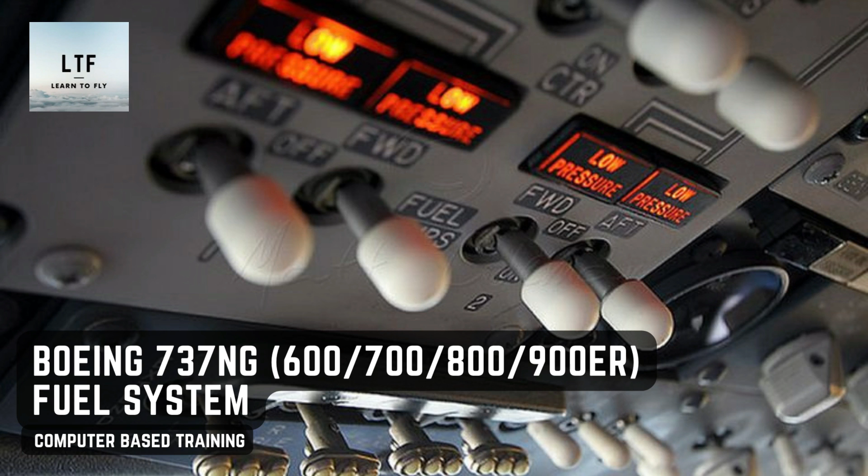The 737 airplane has 3 fuel tanks. Main tank number 1 and number 2 are in the wings. Each tank has a usable fuel capacity of 3,867 kilograms.

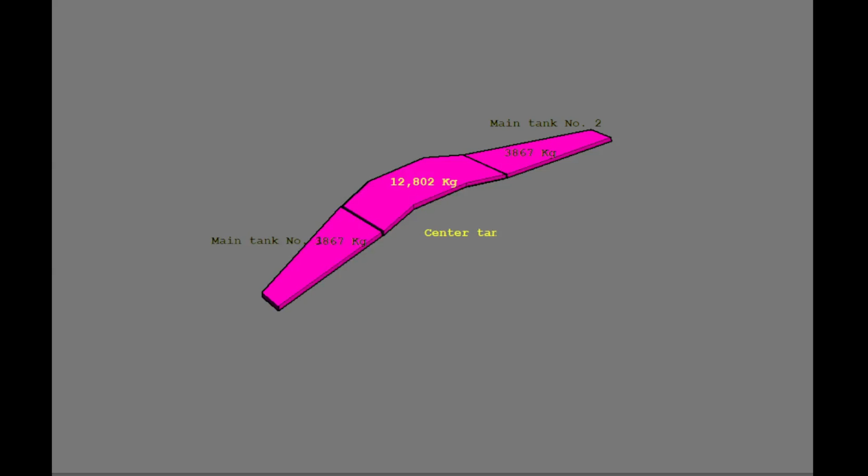Most of the center tank is in the fuselage. The center tank usable fuel capacity is 12,802 kilograms.

The airplane has an external fueling station in the right wing.

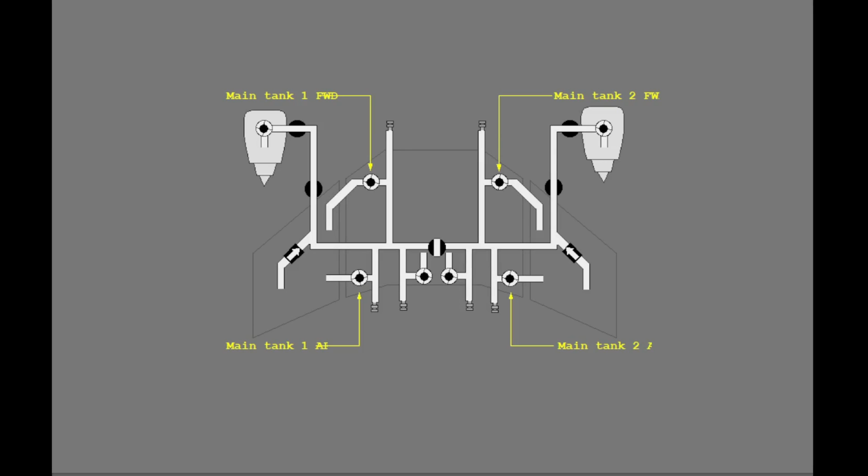Each main tank uses 2 electrical pumps, one forward and one aft. The center tank has a left fuel boost pump and a right fuel boost pump.

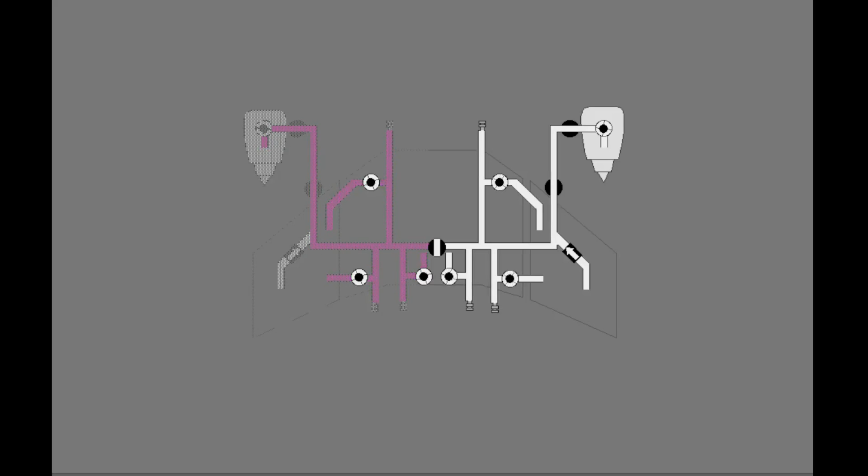The main tank number 1 and the left center fuel pump supply fuel to engine number 1. The main tank number 2 and the right center fuel pump supply fuel to engine number 2.

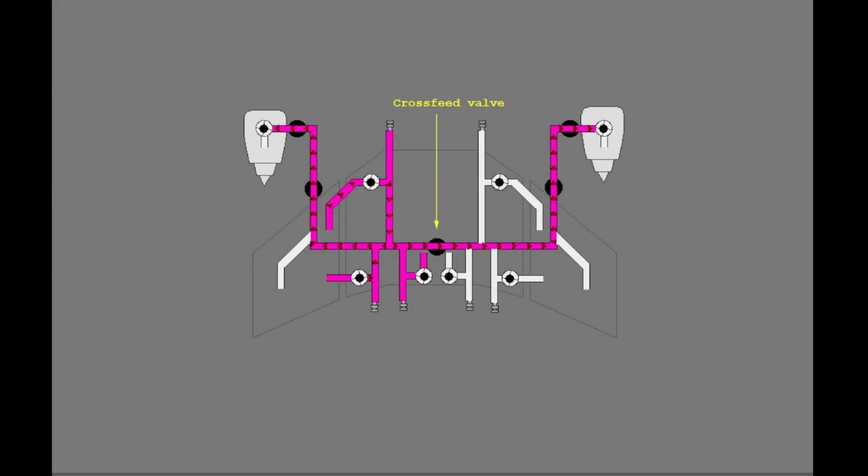The cross-feed valve lets the main fuel tanks supply fuel to the opposite engines. The check valves make sure the fuel flows in the correct direction. This prevents the movement of fuel into the tanks.

The center tank fuel pumps are like the main tank pumps, with 2 differences. First, they have a higher output pressure than the main tank fuel pumps, so center tank fuel is used before main tank fuel.

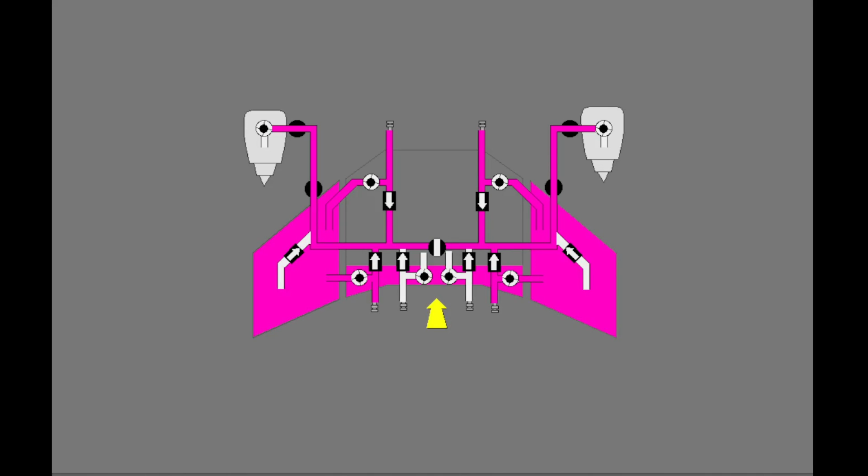In addition, the center tank pumps have auto shutoff logic. It shuts off the associated pump when the fuel pressure decreases to a preset value.

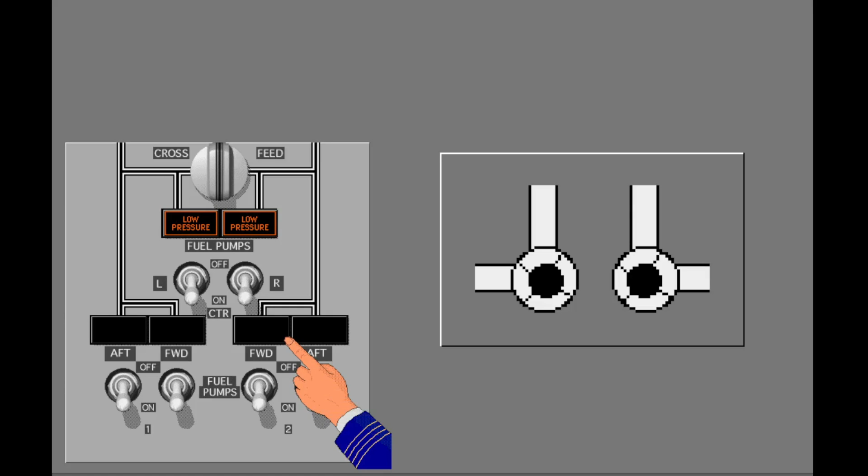Selecting a center tank pump switch off, then back on, resets the auto shutoff logic, and the pump returns to operation until deactivated by low pressure.

An engine fuel shutoff valve and a spar fuel shutoff valve are in each fuel line to the engine and are electrically operated.

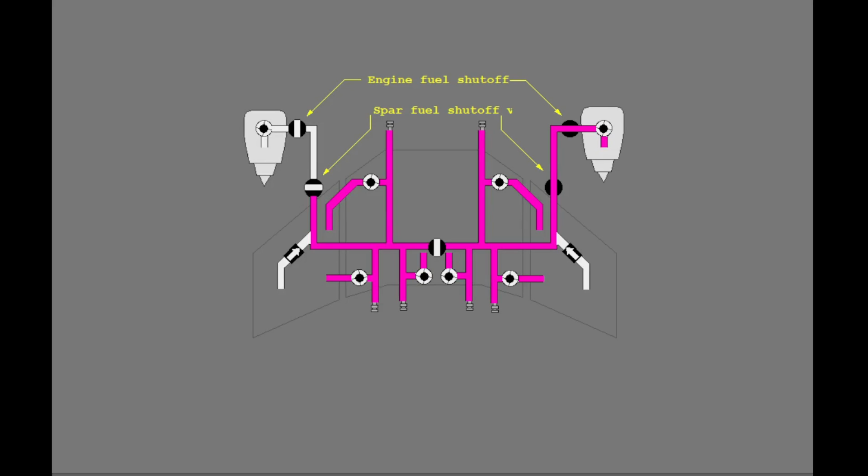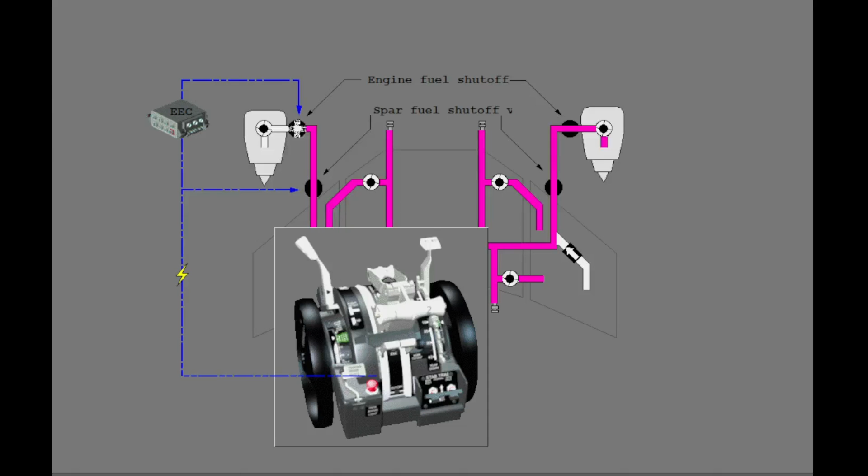The spar fuel shutoff valve is electrically controlled directly by the engine start lever, while the engine fuel shutoff valve is electrically controlled through the electronic engine control.

The engine fire warning switch electrically controls the 2 valves.

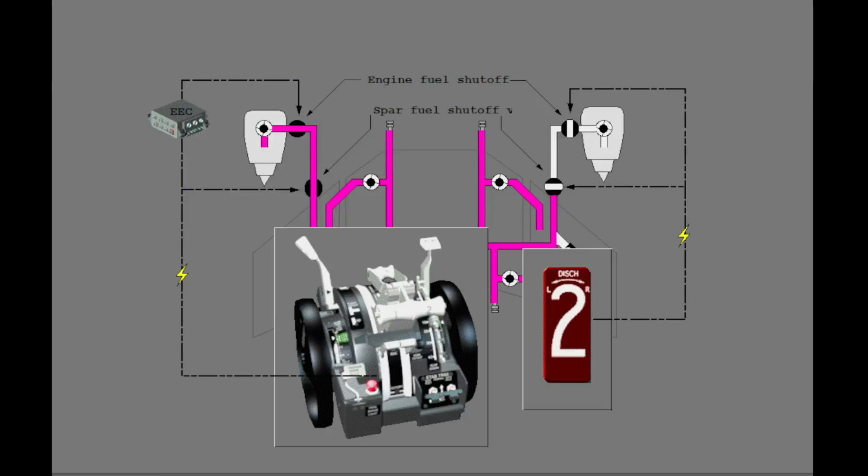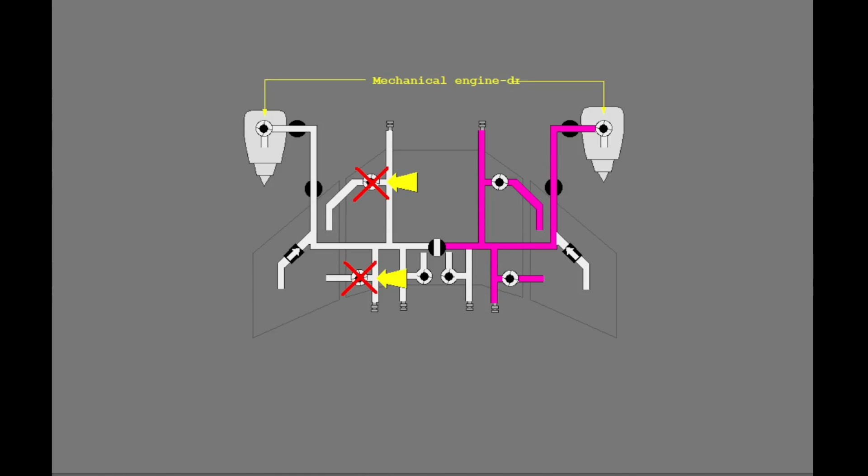A mechanical engine-driven fuel pump supplies suction fuel feed when there are no fuel pumps to supply pressurized fuel to the engines. In this example, the 2 main tank number 1 fuel pumps have failed and there is no fuel in the center tank.

The mechanical engine-driven fuel pump moves fuel through a bypass valve in each main tank. There is no bypass valve in the center tank.

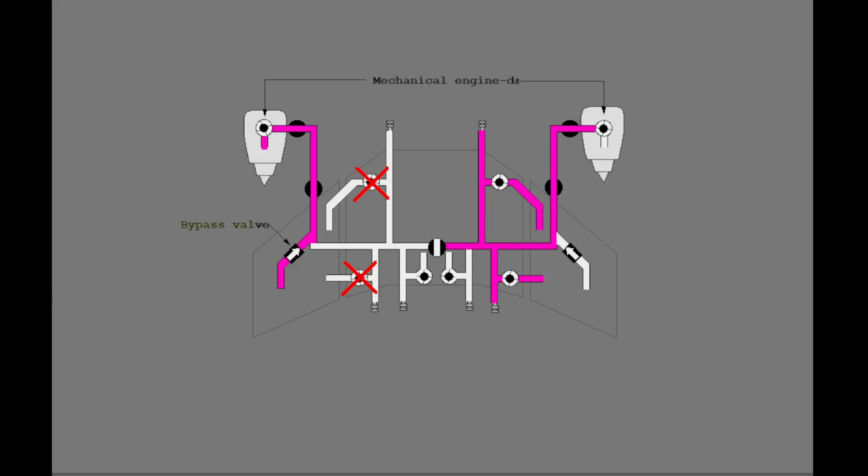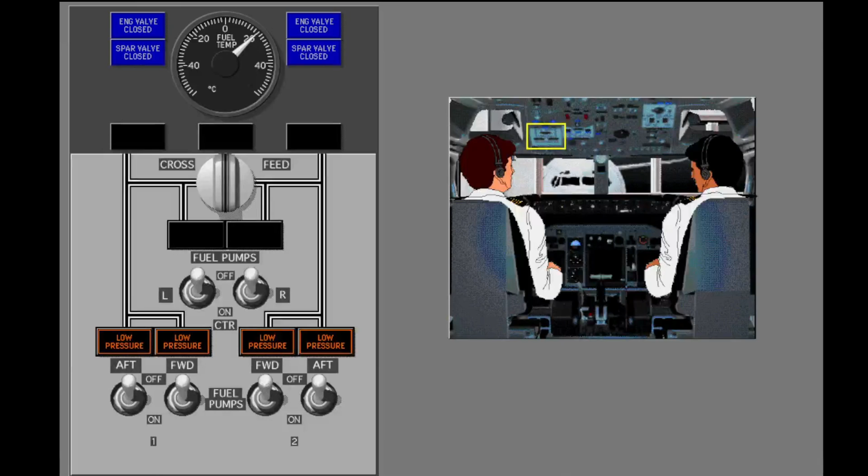The fuel control panel is on the forward overhead panel. The fuel pump switches operate the fuel pumps.

Now turn on the right center tank fuel pump. The right center fuel pump now supplies fuel to the right side of the fuel system.

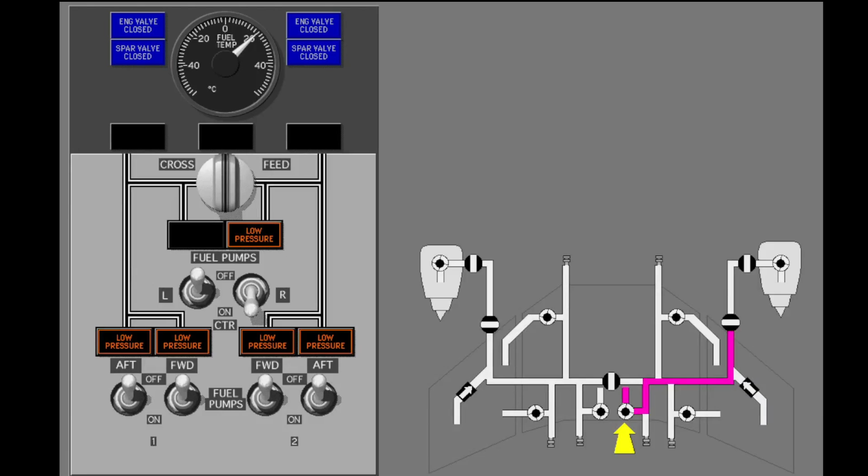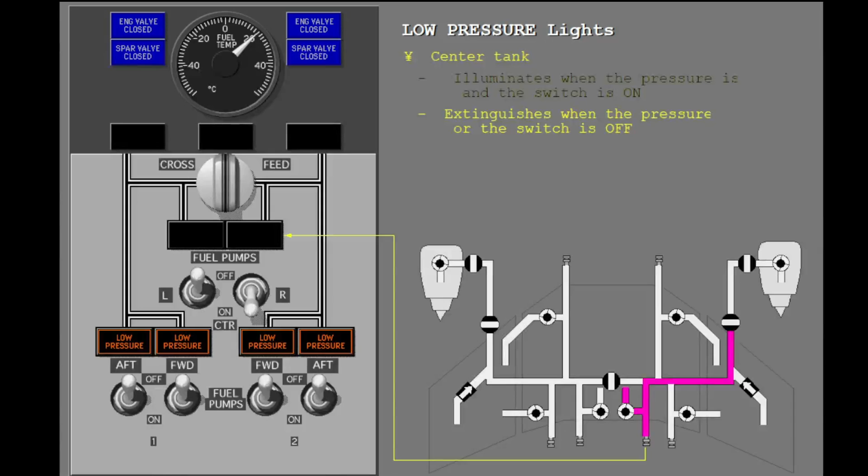A low pressure light for the right center fuel pump illuminates when the output pressure is low and the related fuel pump switch is in the on position. The light extinguishes when the pressure is normal or the switch is in the off position.

Turn on the left center tank fuel pump and look at the indications. Turn on the two fuel pumps for main tank number 1.

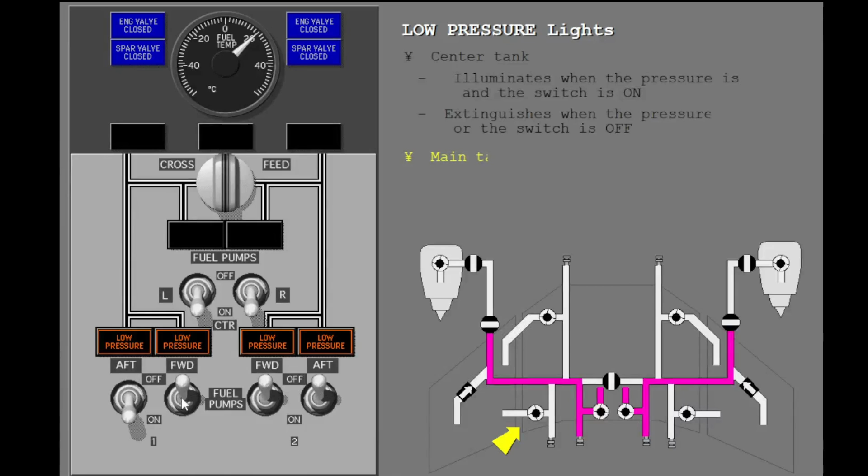The low pressure light for a main tank fuel pump illuminates when the output pressure is low or the switch is in the off position. Unlike the center tank pumps, main tank pump low output pressure does not deactivate the pump.

The light extinguishes when the output pressure is normal and the switch is in the on position. Turn on the two fuel pumps for main tank number 2 and look at the indications.

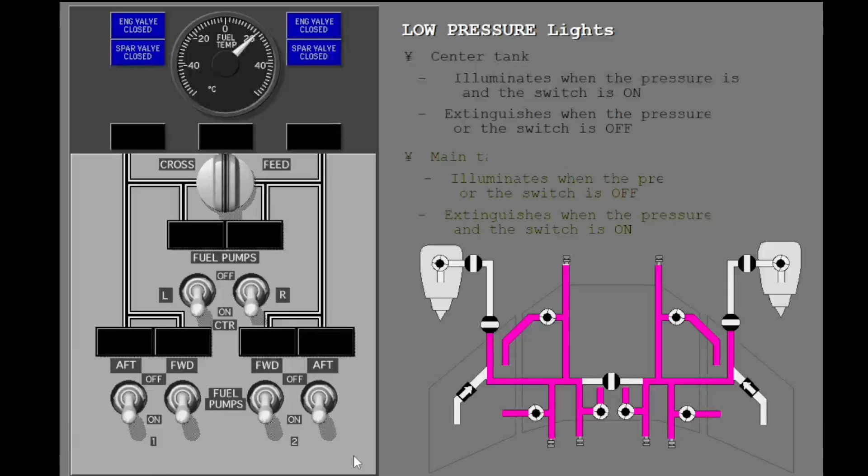The cross-feed selector controls the cross-feed valve. The selector is in the closed position and the related valve open light is extinguished. Open the cross-feed valve and look at the indications.

When you turn the selector to open, the valve open light illuminates bright. It shows the cross-feed valve is in transit or not in the commanded position.

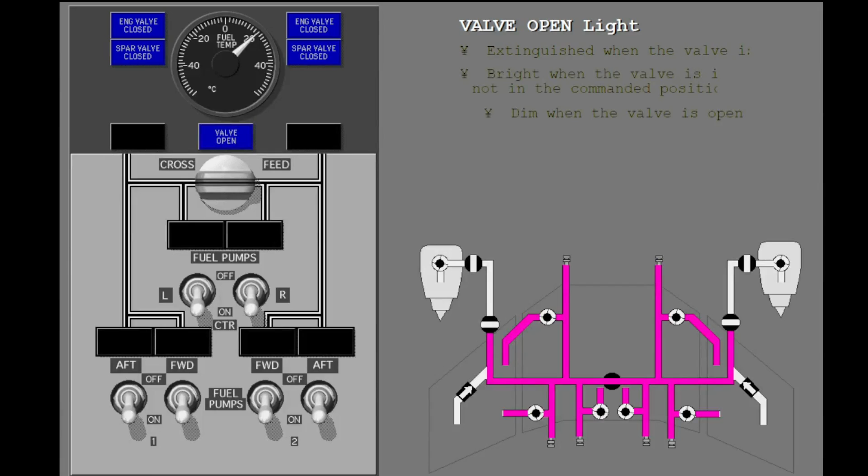The light illuminates dim when the valve is open. When the cross-feed valve is open, the right and left sides of the fuel system are connected. Now close the cross-feed valve and look at the indications.

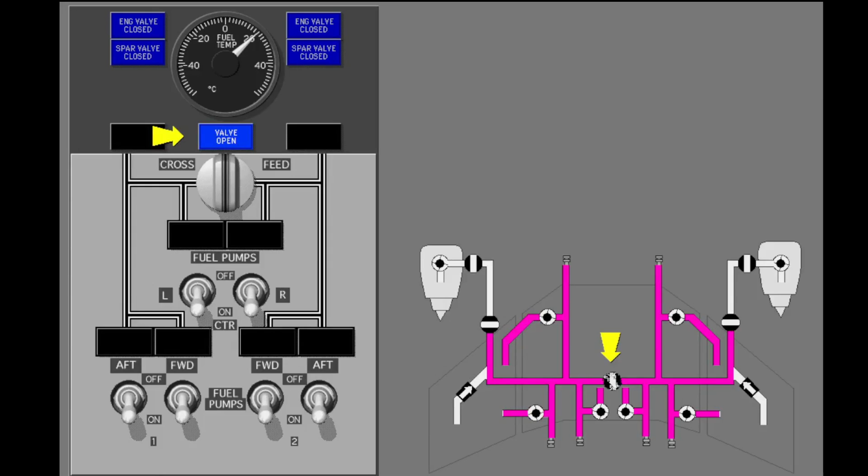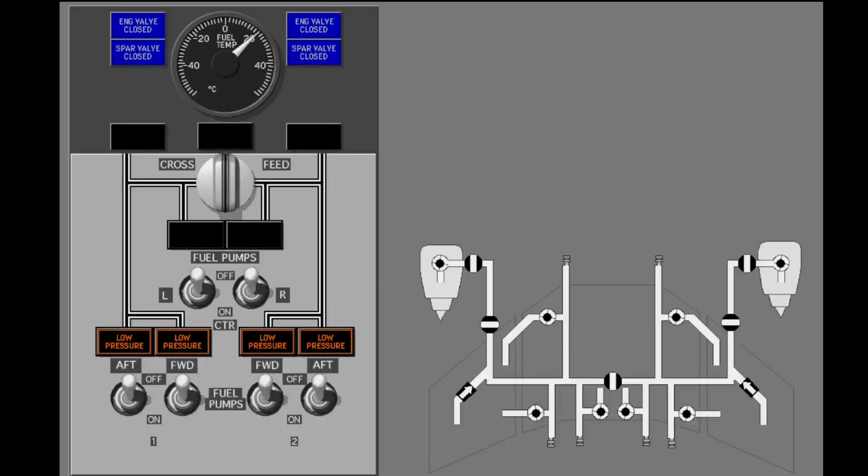The fuel system is now in a typical pre-flight configuration. The engine valve and spar valve closed lights show the positions of their related fuel shutoff valves.

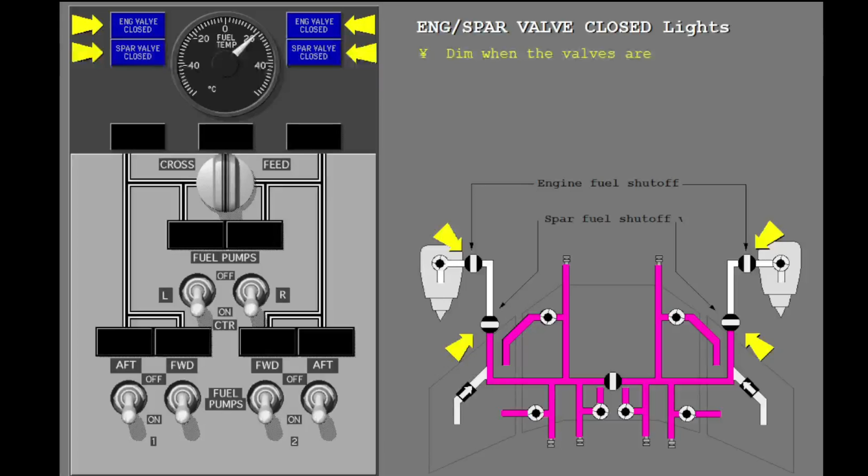When the valves are in the closed position, the lights illuminate dim. The lights illuminate bright when the valves are in transit or not in their commanded position. The lights extinguish when the valves are open.

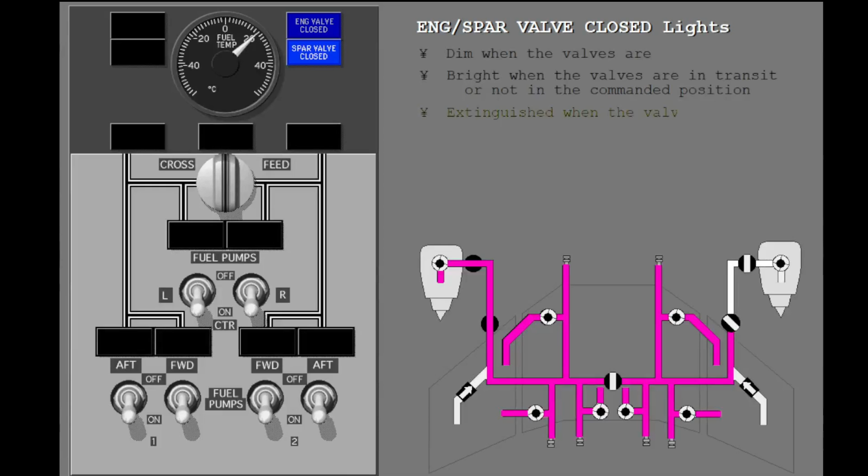The fuel temperature indicator shows the fuel temperature in main fuel tank number 1. The maximum permitted fuel temperature is 49 degrees Celsius.

The minimum permitted fuel temperature is the higher of two values: minus 43 degrees Celsius or the fuel freeze value plus 3 degrees Celsius.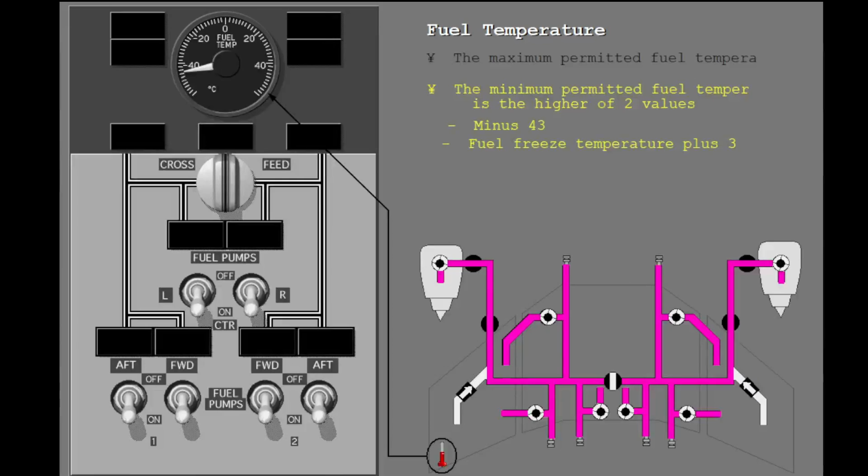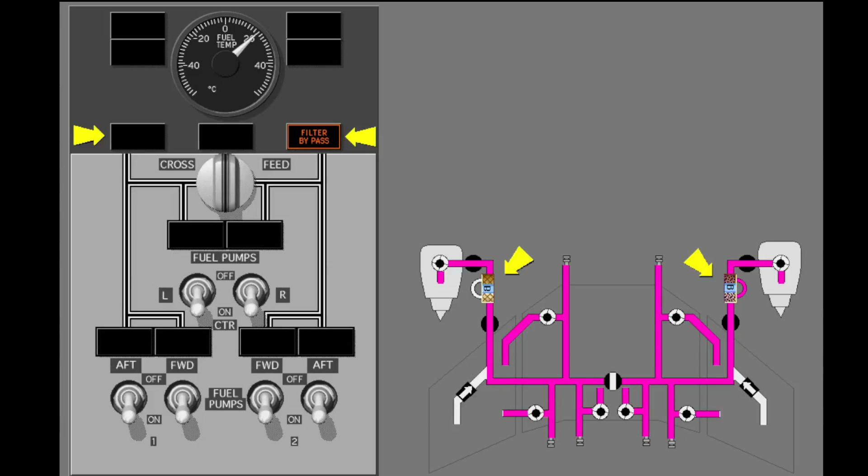The filter bypass light illuminates to show there is an impending filter bypass because the filter is contaminated.

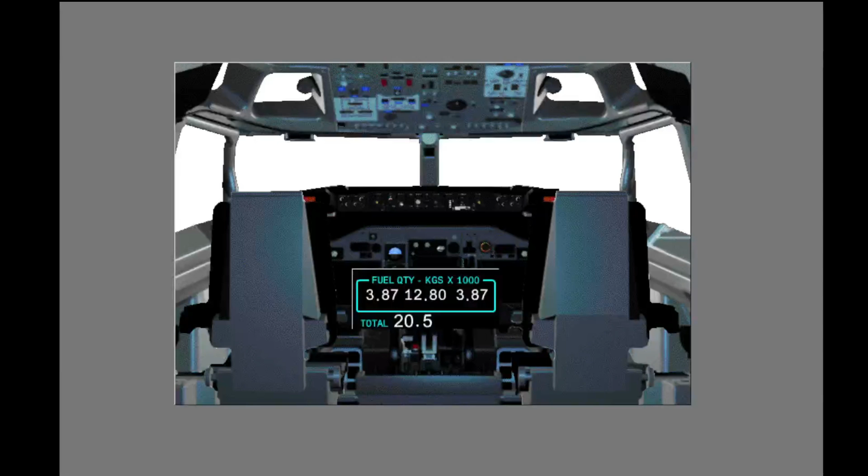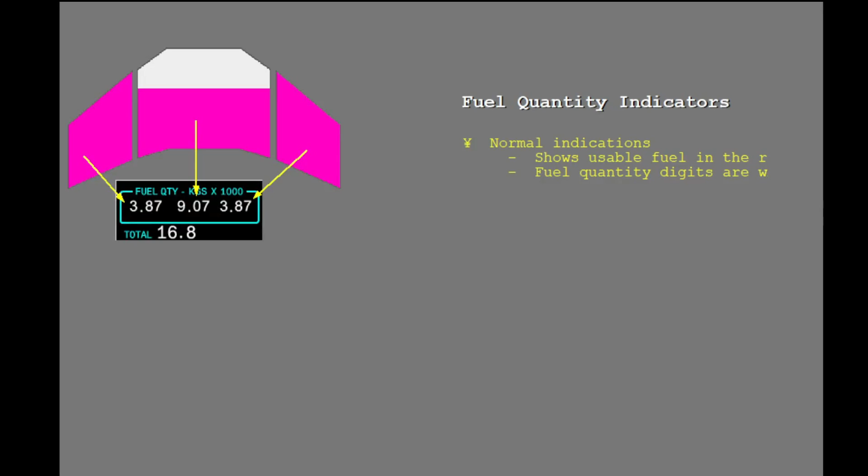Fuel quantity indicators are on the upper display unit. The fuel quantity indicator shows the usable fuel in each tank. Touch any control or indicator to review its function.

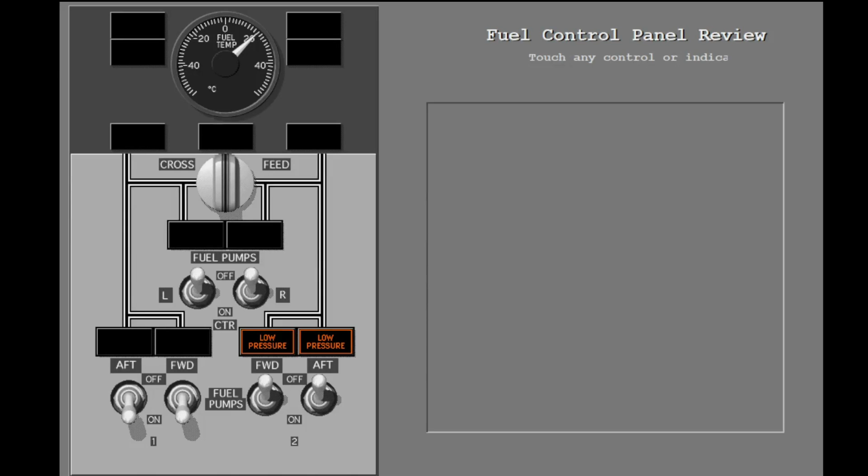For pre-flight, you set the fuel control panel for engine start. First, make sure the engine valve and spar valve closed lights are illuminated dim, and the filter bypass lights are extinguished. Close the cross-feed valve.

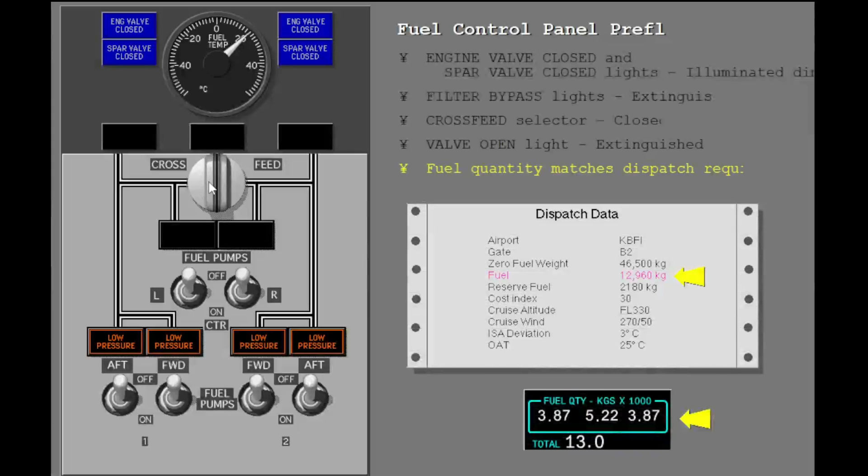Make sure the valve open light is extinguished and the total fuel quantity matches dispatch requirements.

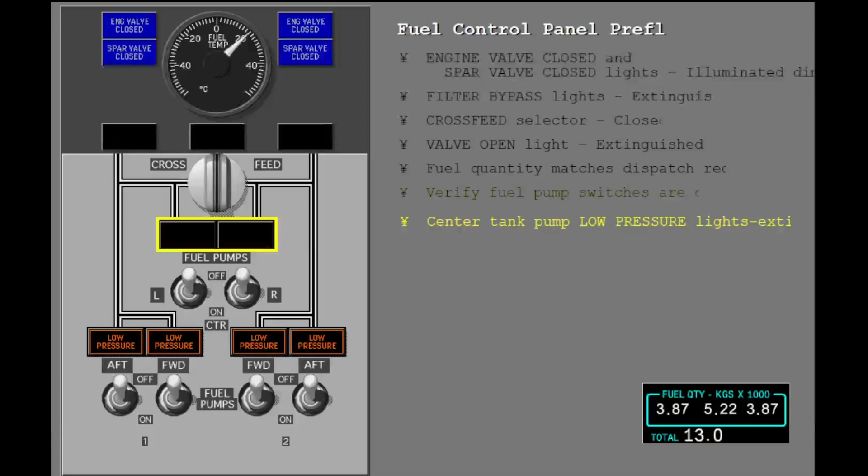The fuel pumps for the tanks remain off. The pumps will be selected on later during the engine start procedure. Make sure the center tank low pressure lights are extinguished and the main tank low pressure lights are illuminated. The fuel control panel portion of the first officer's pre-flight is now set.

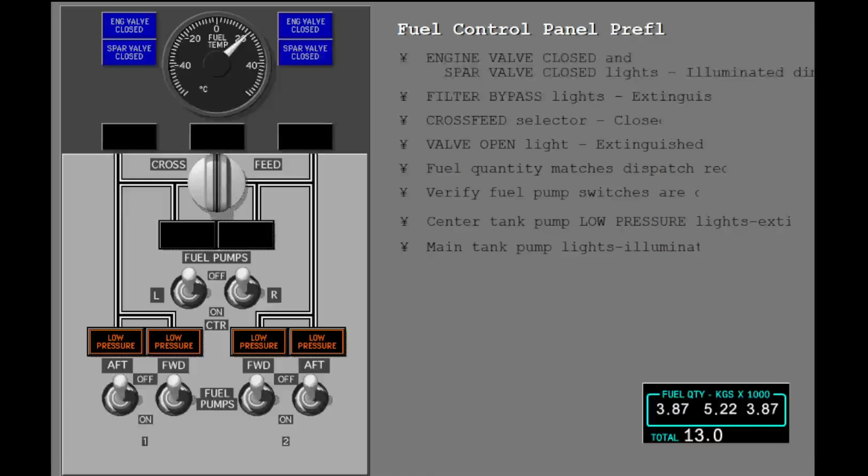It's now departure time. You have received a clearance for engine start. Accomplish the before start procedure. Center tank quantity is more than 500 kilograms, so turn on the center tank pumps with the other pumps.

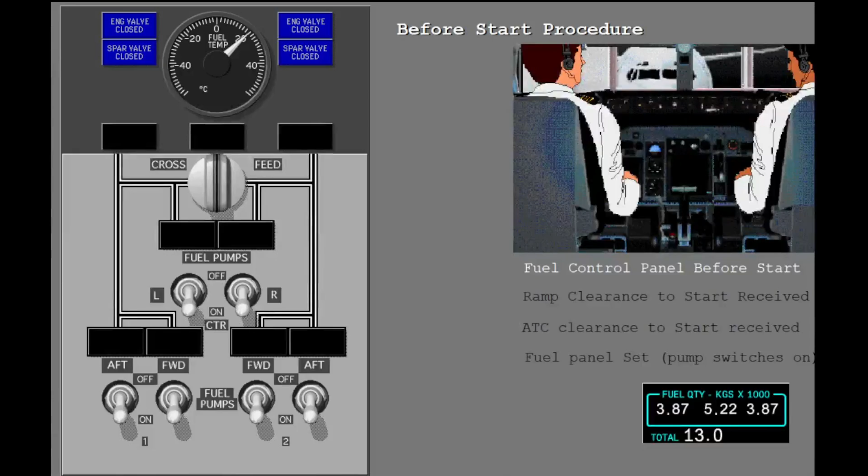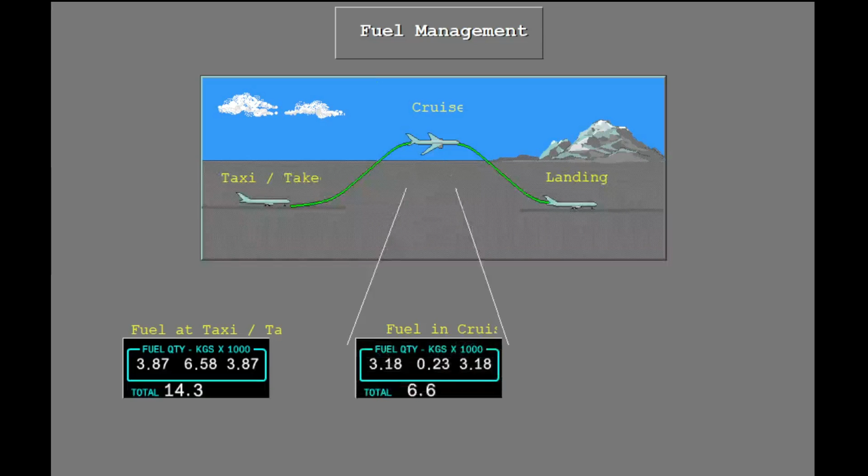We now discuss fuel management for normal flight operations. Fuel must be balanced for taxi, takeoff, cruise, and landing.

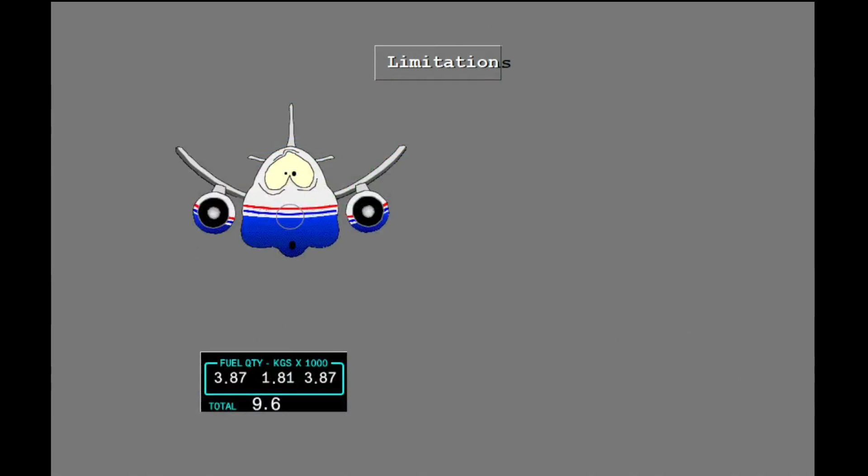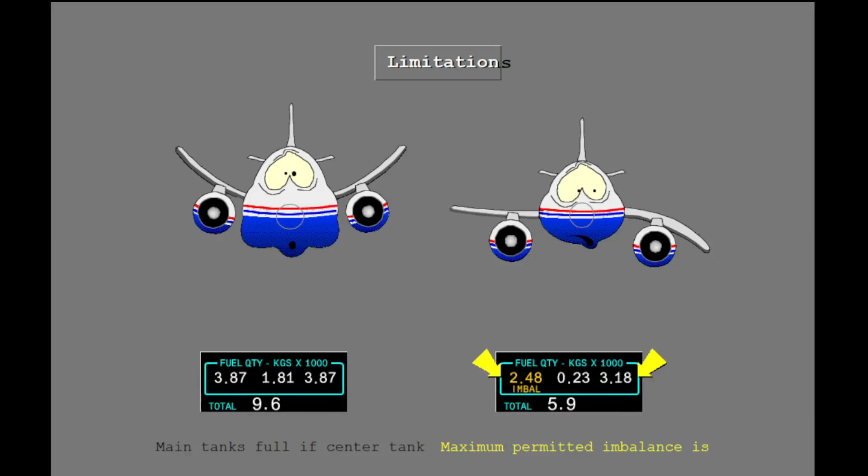The two main fuel tanks must be full if the center fuel tank has more than 453 kilograms of fuel. The maximum permitted difference in fuel quantities between the main tanks is 453 kilograms. If the difference is more than 453 kilograms, an amber imbalance alert is shown on the indicator with a lower fuel quantity.

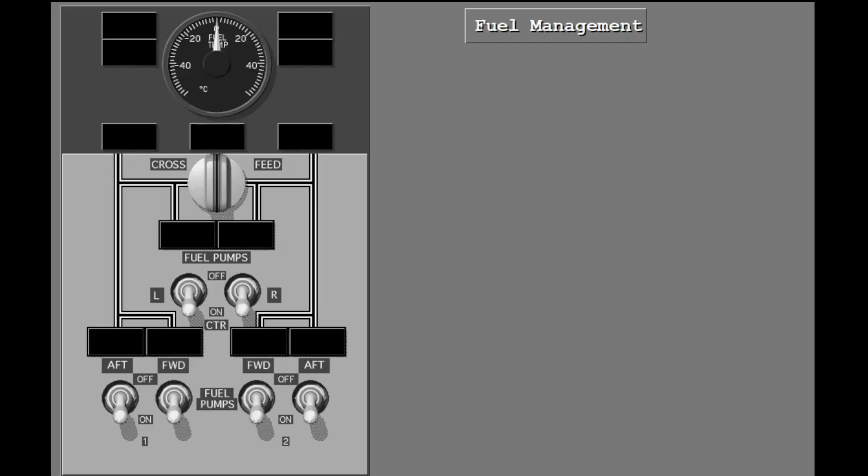Now let's continue fuel management during normal flight operations. During climb and cruise, if a center tank low pressure light illuminates, move the pump switch to the off position.

If a center tank pump low pressure light illuminates with the center tank empty during climb or cruise, move both switches to the off position. Select both pumps off now. Continue.

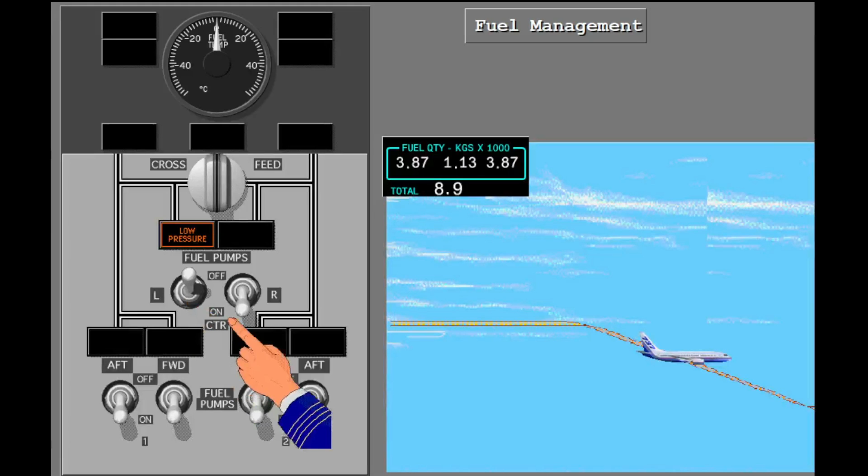During descent, if a center tank low pressure light illuminates, move the pump switch to the off position.

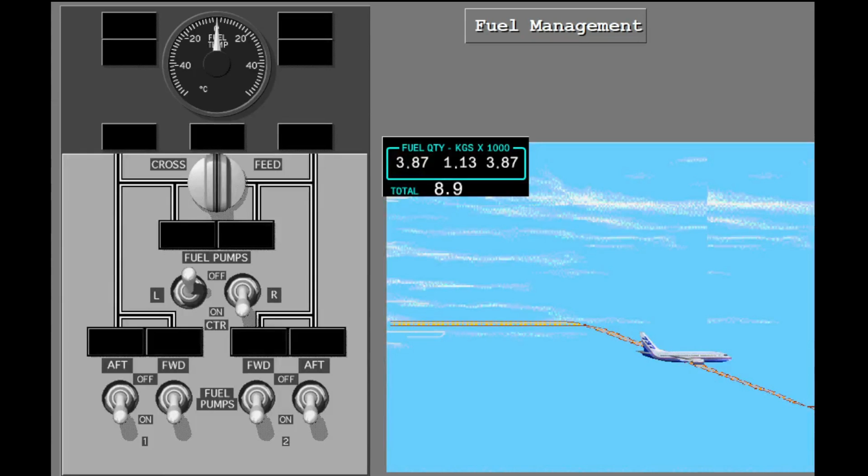On descent, if extended level off is required for holding or other reasons, and center wing quantity has usable fuel with pumps selected off, set the pump switches to the on position. Select the pump switches off when the low pressure light re-illuminates.

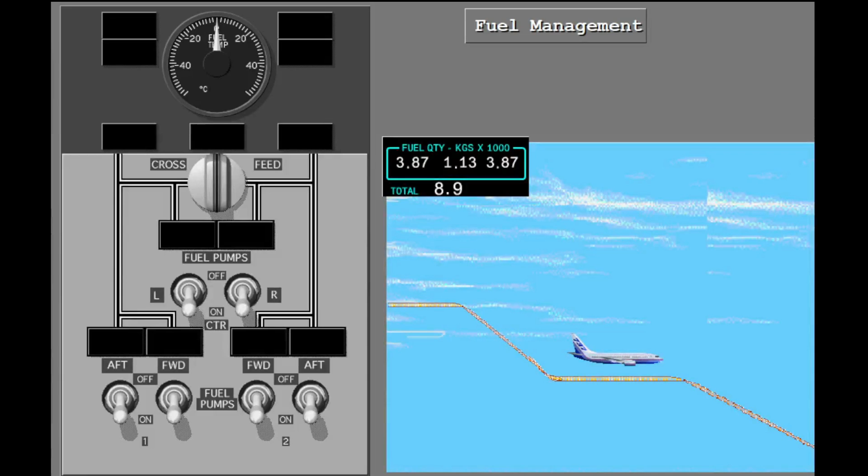If a center tank pump low pressure light illuminates with the center tank empty, then move both switches to the off position. Select the pumps off now. Continue.

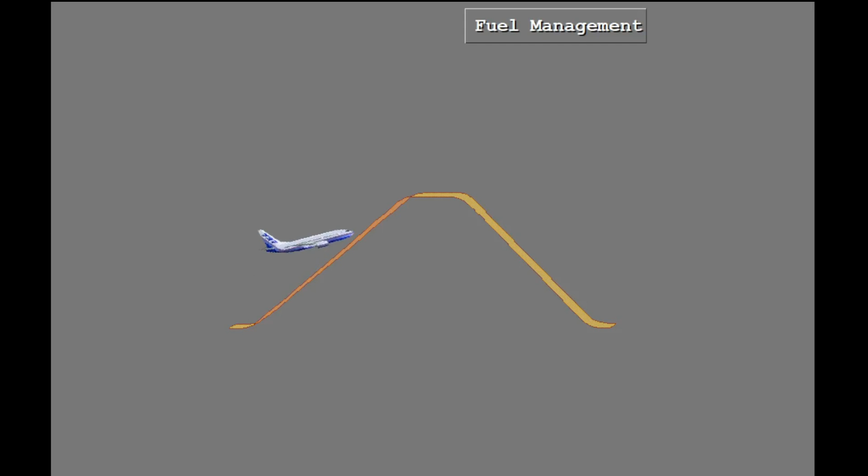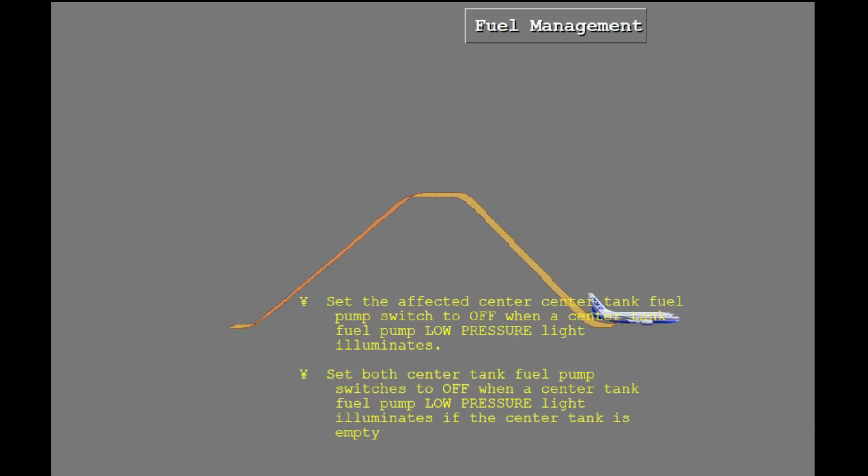Take a few moments to review center wing fuel pump operation for climb and descent, then continue to the next frame.

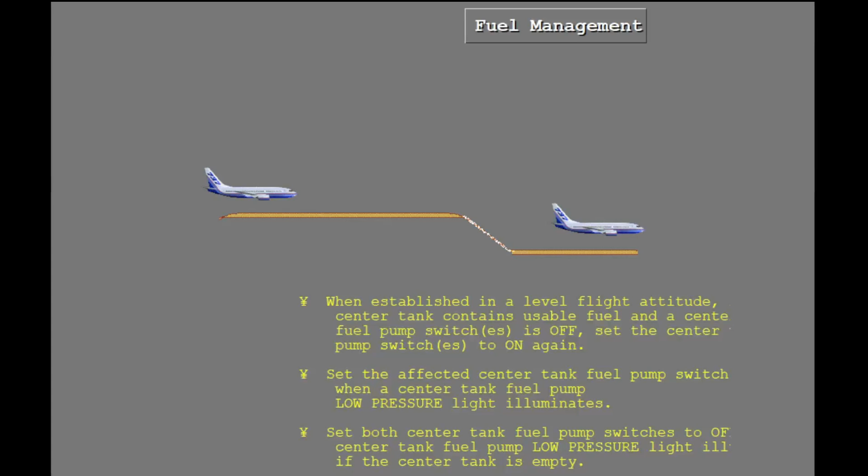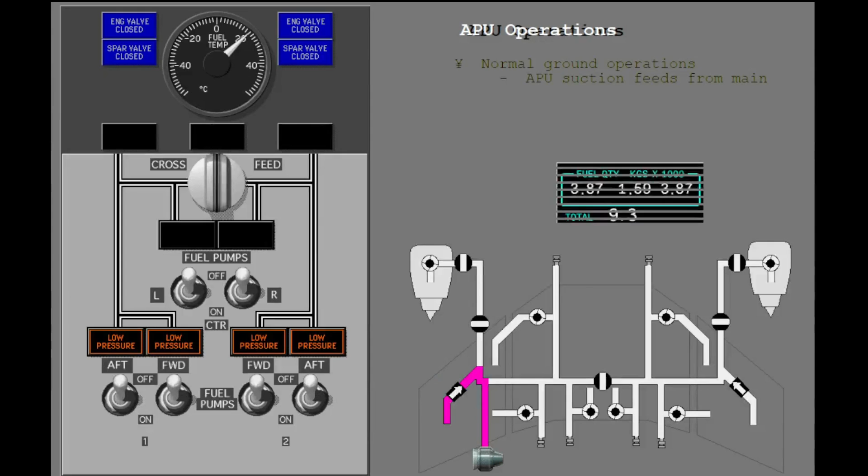For normal ground operations, the APU uses suction to get fuel from main fuel tank number 1. But extended APU operations can cause a fuel imbalance.

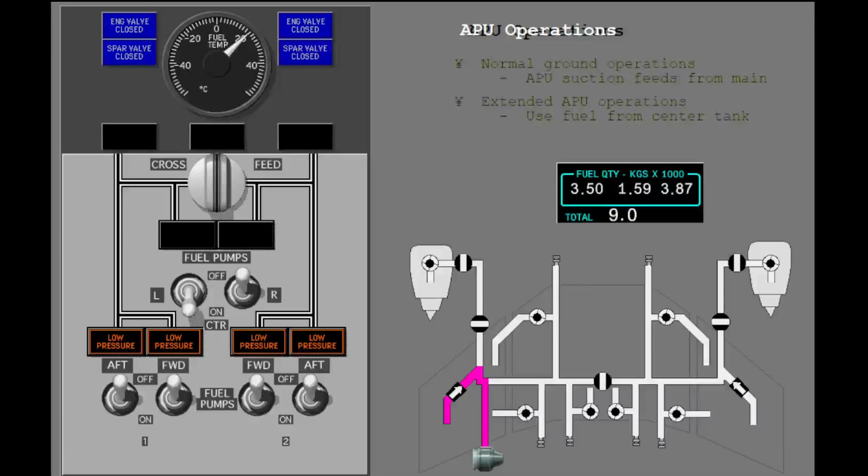If extended APU operations are required, fuel from the center tank is used to prevent an imbalance. Turn on the left center tank fuel pump. Now the APU gets fuel from the center tank.

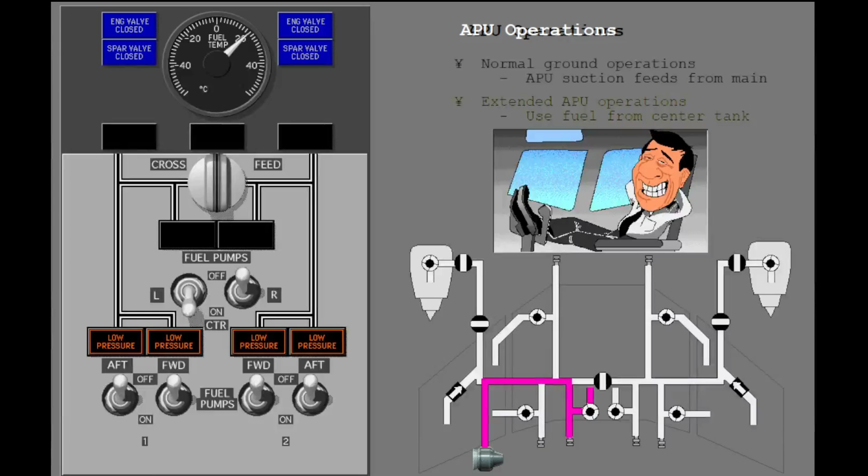The flight is completed and the airplane is at the gate. After engine shutdown, turn off all the fuel pumps.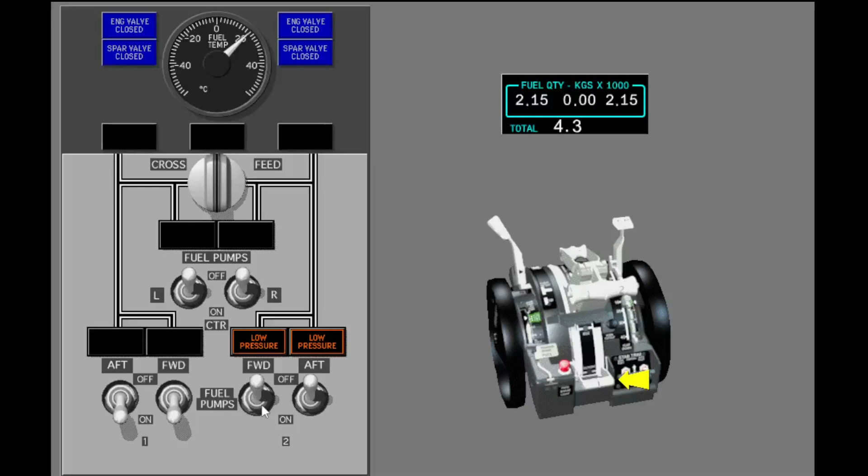Let's now look at some non-normal conditions related to the fuel system. There are 3 non-normal conditions that relate to fuel quantity. They are fuel configuration, fuel imbalance, and low fuel.

With these conditions, an amber alert shows on the affected indicator and the digits and arc color change to amber. In this example, there is a fuel imbalance.

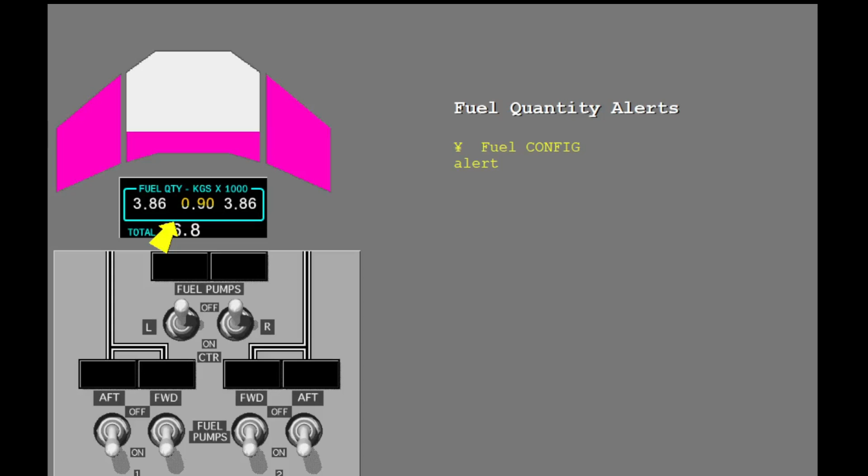A fuel configuration alert is shown on the center tank if the fuel quantity in the center tank is greater than 726 kilograms, at least one engine is running, and the 2 center tank pumps are off. In this example, the center tank pumps are off.

The alert is inhibited when the center tank fuel quantity is less than 363 kilograms.

If there is a difference in fuel quantity between the main tanks of more than 453 kilograms, a fuel imbalance alert is shown on the indicator with the lower fuel quantity. The alert extinguishes when the imbalance is less than 91 kilograms.

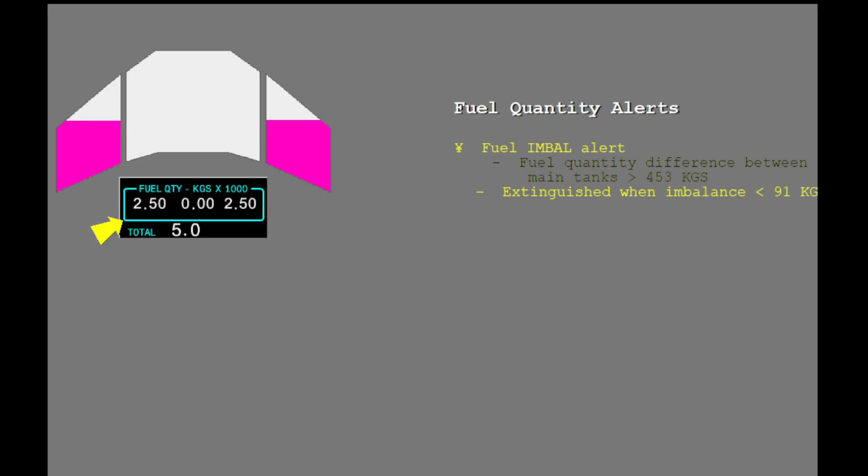A fuel low alert is shown when the fuel quantity in a main tank is less than 907 kilograms. The fuel low alert inhibits the fuel imbalance alert when the 2 conditions exist. The alert extinguishes when the fuel quantity is more than 1,134 kilograms.

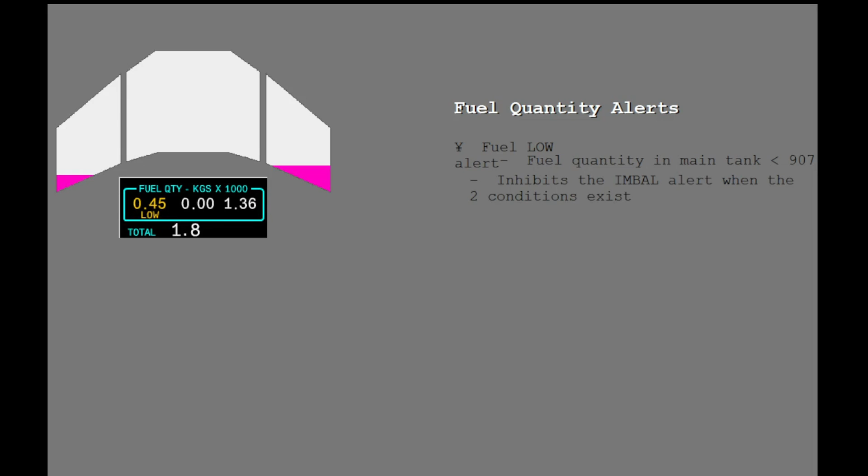Here is a review of the fuel quantity alerts.

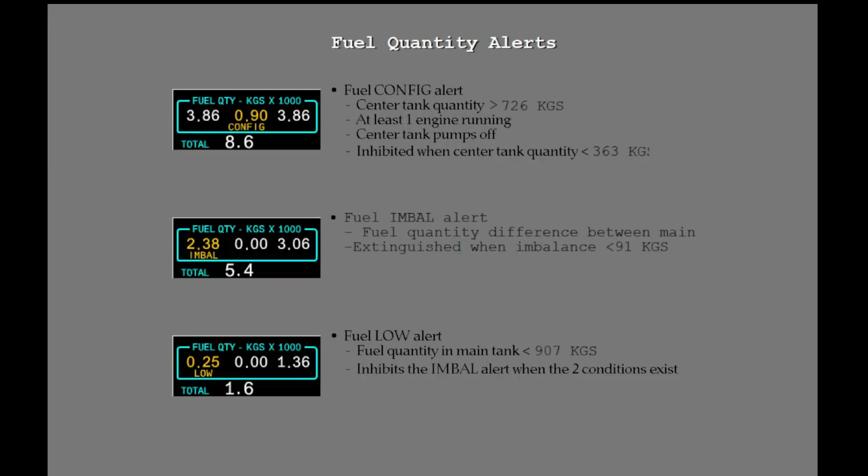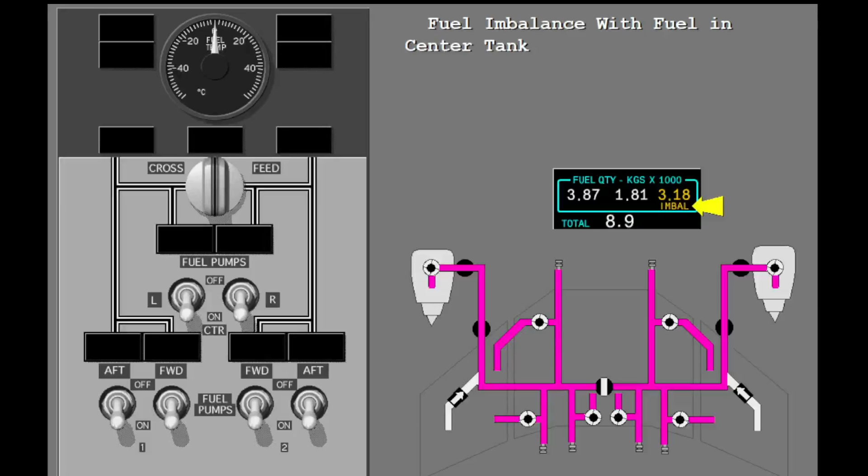Now let's correct an in-flight fuel imbalance. The first example is an in-flight fuel imbalance with fuel in the center tank. To correct this imbalance, first turn off the two center tank fuel pumps.

Now open the cross-feed valve. Next, turn off the fuel pumps for the main tank that has the lower fuel quantity.

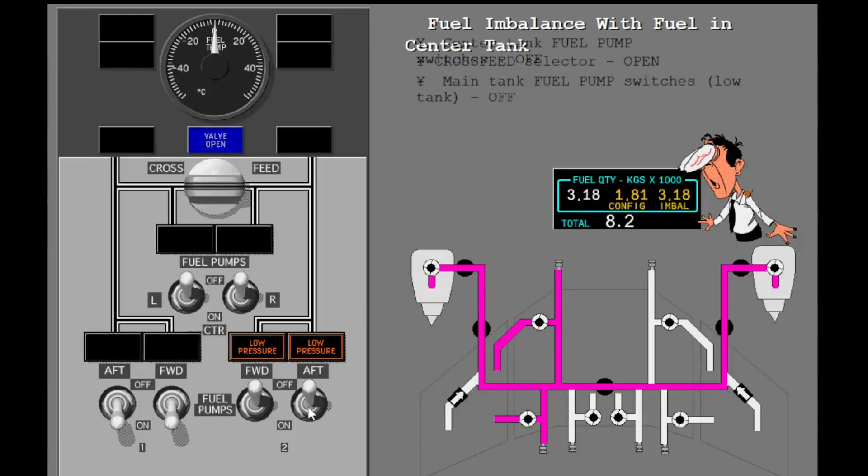Engine number 2 now gets its fuel from main tank number 1. Monitor the fuel quantity indicators until the fuel is balanced.

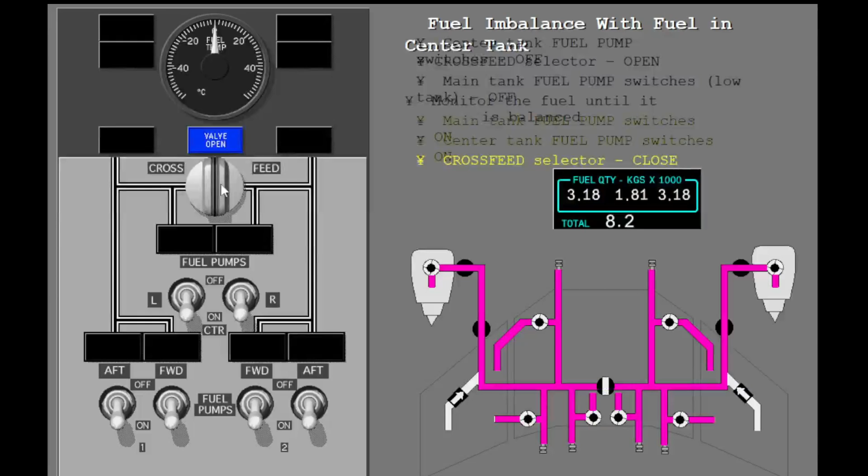When the fuel is balanced, turn on the main tank fuel pumps. Turn on the center tank fuel pumps. Close the cross-feed valve. Continue to monitor the fuel quantity indicators and keep the fuel balanced.

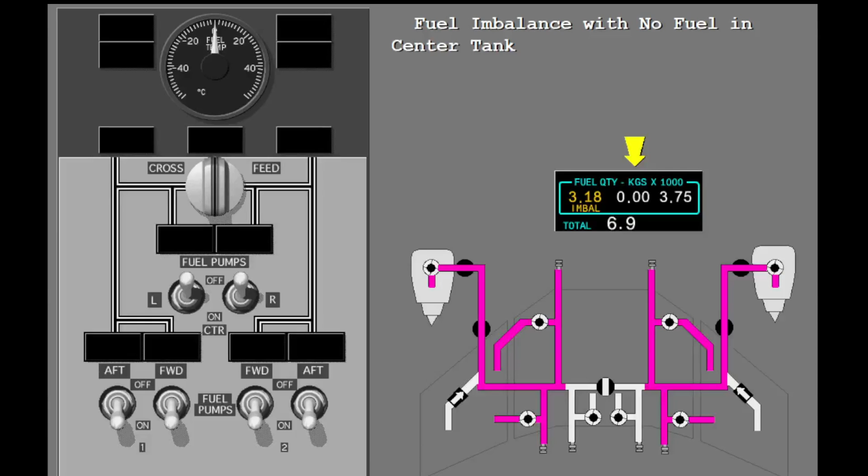This example shows fuel imbalance with the center tank empty. To correct this imbalance, use the same steps as before, but it is not necessary to turn off the center tank fuel pumps.

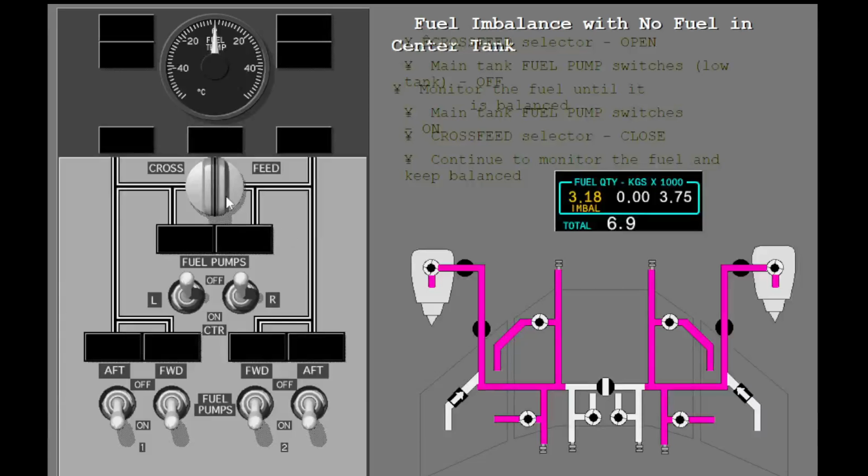The last non-normal condition is related to the quality of the fuel. If the fuel filter has contamination and there is an impending fuel bypass, the filter bypass light illuminates.

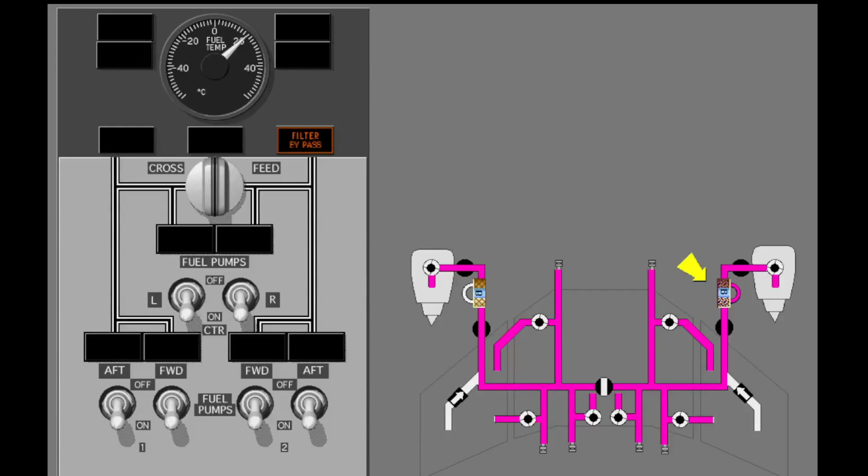The fuel system annunciator and master caution lights illuminate. Reset the master caution system.

Degraded engine operation can occur when the filter bypass light is illuminated.